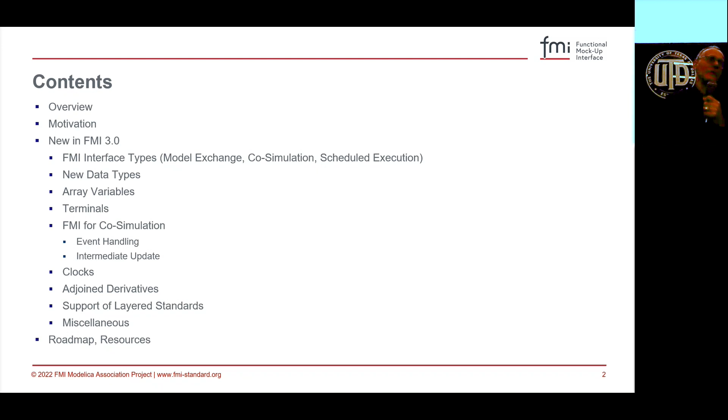So I talk a lot about the motivation for why FMI3 was actually necessary, because FMI 2.0 has been incredibly successful, and because of that, new use cases came up. Then I basically go through all the new features in FMI3 and give motivations why they were added, what it's good for, and what to expect from that. Then I'll talk a little bit about the roadmap - where are things going next with FMI, because there's really still very active ongoing work.

So let me do a little bit of a comparison. On the geometry side, there has been something that has actually contributed to the name giving of FMI - the digital mockup for packaging geometry, structures and parts. So if companies work together, they deliver geometry of their components as CAD data, and it's really easy to compose very complex structures from digital files which are transferred between companies, and they really just fit together.

There's been a whole other set of standards in order to enable that, and that has been going on for much longer actually than the Modelica Association. So OEMs can assemble these from the whole virtual system, and you can check consistency of these things, compute design envelopes, evaluate how things can be assembled and disassembled, etc. But there's no behavior in it. And that was basically the idea behind FMI.

But with FMI2, we didn't get far enough, because this really easy composability and assembly—being able to compose a much larger simulation just from the units—wasn't quite there in FMI 2.0. Taking a step back, I think it was completely right to do FMI 1 and 2 as they were, because in terms of complexity of the standards, it's a big step up in complexity and capability.

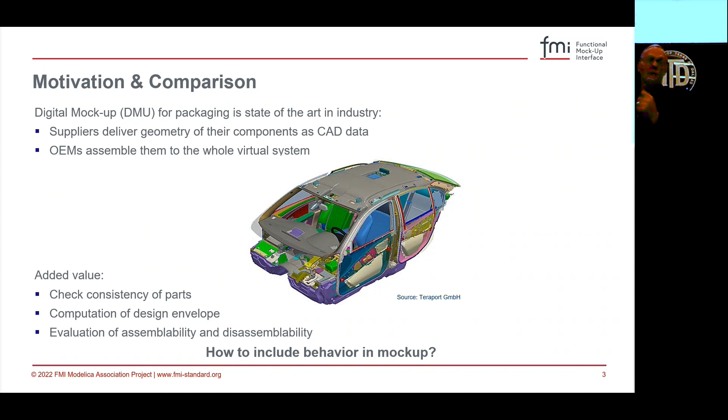We now have more than 170 known tools supporting FMI 2.0, plus plenty of unknown and in-house tools. I think the uptake with FMI 3 will be slower because it's a lot more complex, and fewer tool vendors and companies will need its full power. But it is absolutely necessary for the new use cases of really being able to compose complex simulations from simple ones.

So when you go through different design phases—going from concept to design, optimization, implementation, test and verification, and operation—we use models in all of these, models of behavior. And we need to be able to reuse things through these different phases and bring systems together.

We want to go from concept to design, from component design to system design. That is the one step where FMI2 was not always good enough. And then we want to go to test and verification, and that is actually also something where EFMI comes in.

And then finally to operations and digital twins. On that side, you also have things like MPC—model predictive control—and that's really where EFMI will come in.

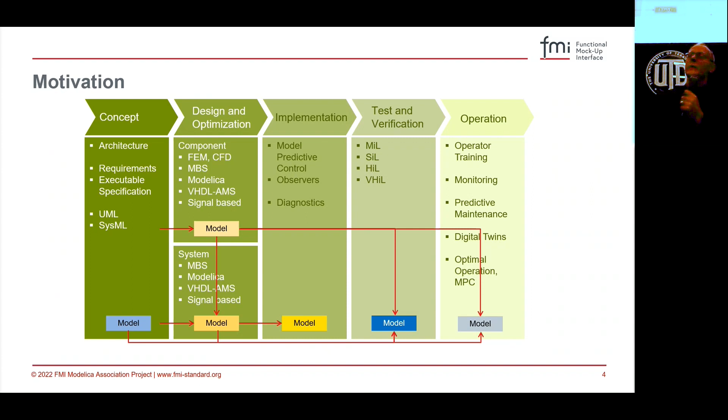So FMI brought us simpler plumbing for simulation. We have the model exchange, which is really ODEs with discrete events on how to connect systems of equations, and FMI for co-simulation to connect any model.

This whole FMI2 enabled a massive reuse of modeling investment, and has, I would say, brought enormous progress to the industry in terms of being able to reuse models through phases and reuse modeling investment. And FMI2 has enabled new use cases that actually require extensions to the standard in order to really get to where we are now.

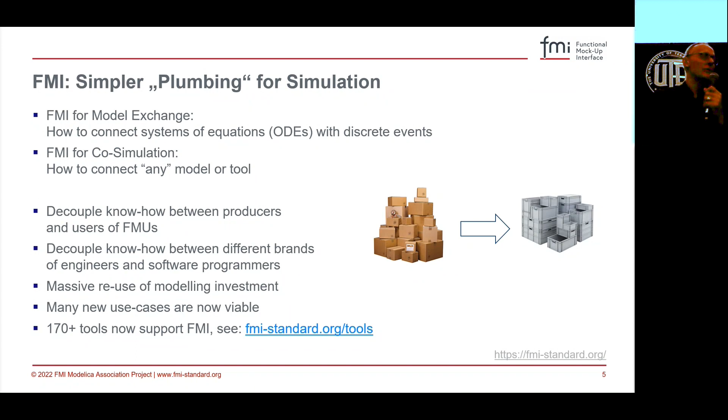And so the appetite came from the eating, and once FMI2 was there, people then started to have higher expectations of what can actually be done. So what are the use cases that require this?

On the automotive side, it was a lot about virtual electronic control units, where FMI2 works quite well for physics simulation, but it did not enable fully virtual ECUs, where in the testing phase you really want to bring together the physical model and the future controls—not as a model, but using the actual code and an emulator for the ECU. That's the phase where you do the validation and testing, not as model in the loop, but with code generated for the final hardware platform, executed on an emulator of that hardware platform, and then packaged into an FMU and brought into the validation process.

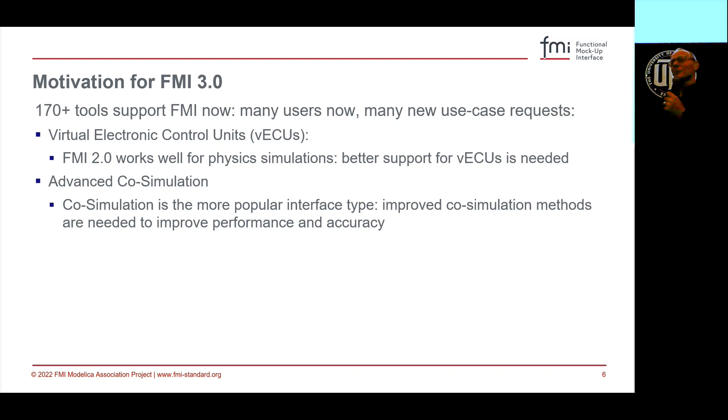Advanced co-simulation—I think I've written an article in NAFEMS magazine a few years ago titled something like 'Co-simulation, Art or Science,' because many co-simulations failed. Everybody that's a controls engineer knows what can go wrong, because you have a delay there, and so you affect the stability of the co-simulation, which has nothing to do with physical stability—it's a numerical instability issue, and lots of people trying co-simulations saw that and failed miserably. So the new features in FMI3 really work at improving the situation, very significantly, in terms of this instability you get with co-simulations.

Multi-FMU simulations are getting more and more common, and this issue from the last slide is something that more and more people actually ran into and saw - well, this doesn't work as well as it was advertised. I thought as soon as I had FMI, I could compose arbitrary FMUs. Well, not quite. Co-simulation is actually incredibly difficult, and I want to go back and make a pitch for Modelica.

Use it only if you absolutely must. Co-simulation you pay for very bitterly with lots of problems, even with FMI3, by the way. So if you can develop a system completely in Modelica, that is much easier. Model exchange in Modelica is much more useful, much less trouble than model exchange with FMUs.

I mean, obviously there are tons of cases where it can't be done. You cannot put the software as executed, like the VECU case, into Modelica. And it's absolutely right to do it with FMU. There's tons of cases which must be FMU, also co-simulation with CFD or finite elements.

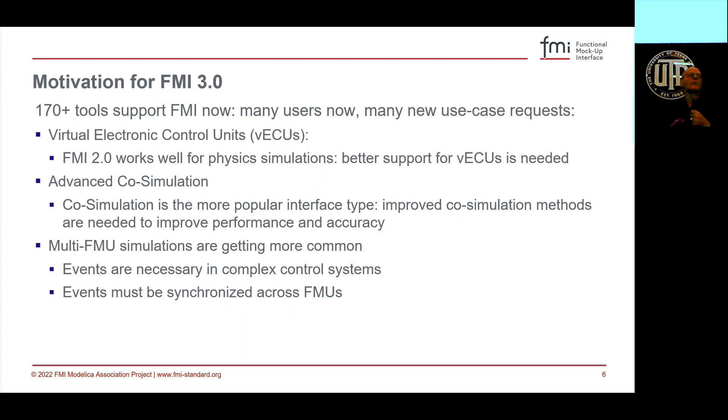But as long as you stay on the system side, I can just repeat what Scott said: reduce the number of tools as few as you can, stay in one framework, it will be so much better. Scott, do you agree? Okay.

And then there's new machine learning and AI applications, and FMI3 will actually help there.

I applied labels to all the new features. So if I talk about the features now, if it's VECU, you know what it's for: co-simulation, events, and AI. So you can track now which of the new features are for which of the use cases that I brought here as a means of simplicity.

So then there's also something which is overarching: API efficiencies. I mean, you can do things in software efficiently and inefficiently, and a couple of things were simply done to be able to do things more efficiently from the software engineering point of view.

So if you look at models and model exchange along the design V, the VECU is very much on the right side, AI mostly on the right side, a lot for operations when we get real data in. But you can also use it early in the design process to really simplify models.

That's actually very much the case from the Julia people. You can sometimes really well use reduced order and AI-based models in the design process to speed up searching a very large design space. Co-simulation and events are on the right-hand side and the left-hand side of the V equally.

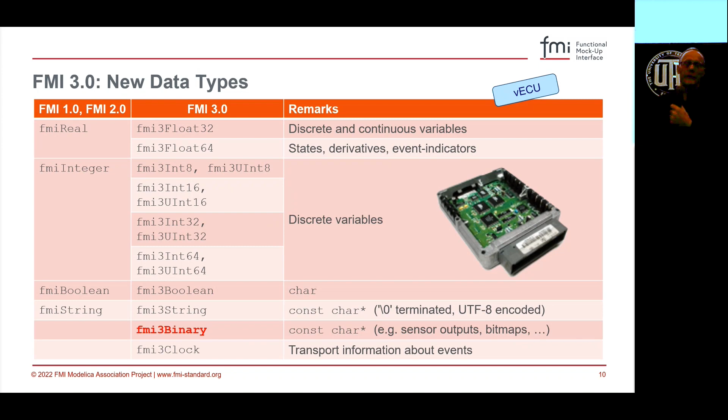So array variables, vectors, and matrices, also for the ECUs, but also a lot for API efficiencies. In FMI3, variables can have multiple dimensions. An element in each dimension can be either constant, specified with a start attribute, or changeable. Then it's a structured parameter, and it can only be changed in configuration or reconfiguration mode.

And so FMI3 set and get operators in the API now work on whole arrays. That's a huge thing in terms of API efficiencies. In FMI2, everything was converted into scalars, and that can be cumbersome.

Terminals and icons, that is really mostly about new use cases, because terminals can group input and output variables in the terminals, which can represent either buses on the control side or physical connectors. So the interesting thing is, you can now make something look like a Modelica model, even though it has a given input-output causality.

So if I may take a small poke at one of the big competitors of Modelica, which are old-style C, C++ tools with fixed causality, like Amesim from Siemens, for example. You can now do in FMI3 exactly what tools like Amesim do in their user interfaces, because they have fixed causalities, but they use terminals with connectors exactly in there in order to make it look like it's an acausal connection, like in Modelica.

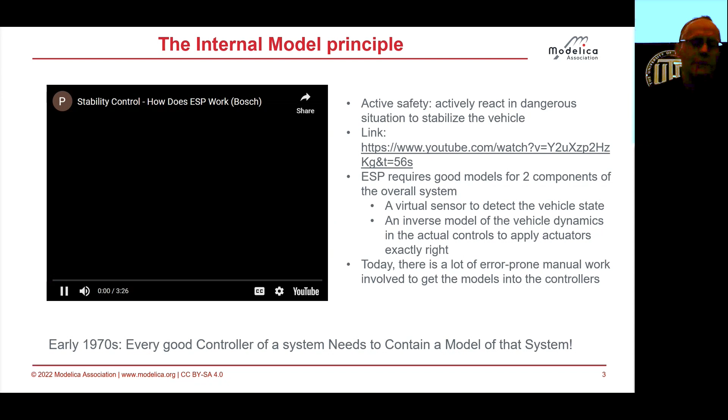Why? Okay, now I start with something slightly more relaxing. I hope this works. I don't know if the audio works. I actually...

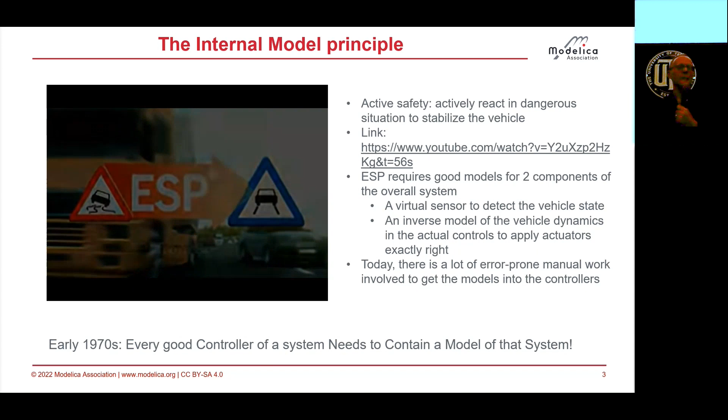This is a video from Bosch about ESP stability control. I have the audio off, so I will just comment on this. Bosch deserves real credit, and that's why I'm showing this video, because they were really one of the main driving forces behind the EFMI standard, and that may become obvious.

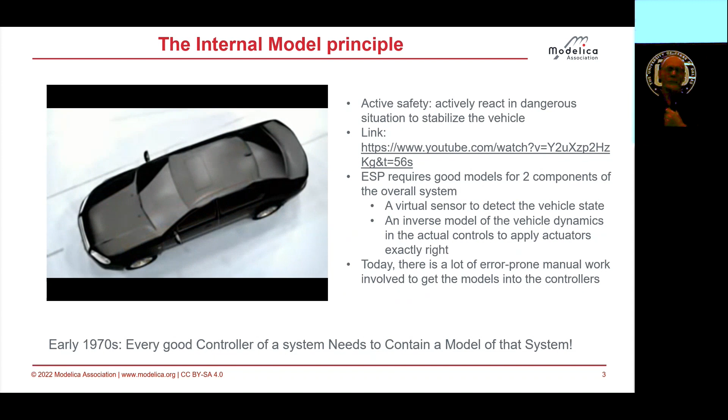What is ESP about? It's active safety in cars. You need to actively react to dangerous situations and stabilize the vehicle. In order to do that, you need models inside of the car, inside the system.

So this is a situation: you drive on a highway, and nothing's happening. You're driving, you get a little drowsy, and suddenly something happens, and then your car starts spinning. ESP is basically about trying, with smart controls, to avoid this situation.

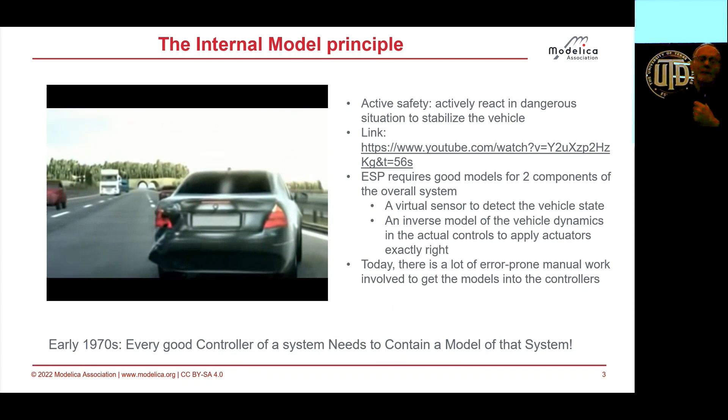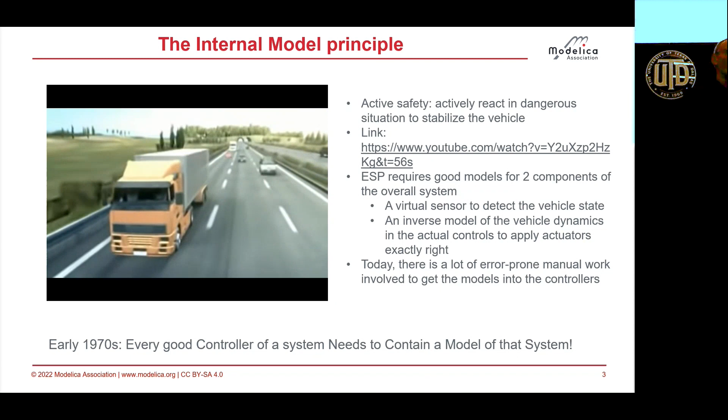So this is now the same simulation, but with a vehicle that has an active ESP system inside. ESP is an electronic stability program or something like that. The controller actively starts reacting and doing stuff. There are lots more situations where ESP can come in, and this video goes on longer, but I want to stop it here. This was just a little bit to start.

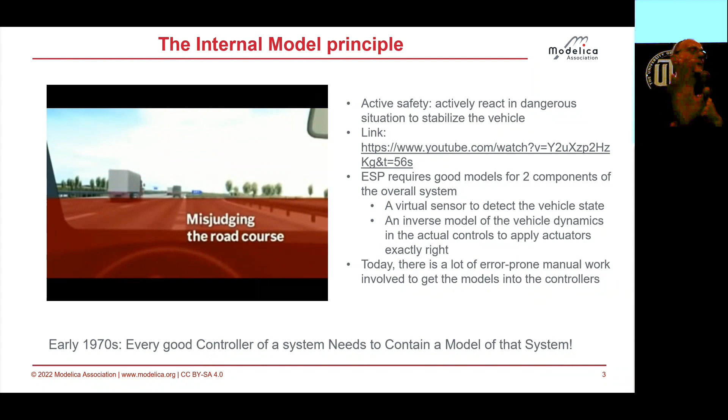Why do we need models in embedded controllers? This is really an old story. Since the early 70s, people have known that every good controller of a system needs to contain a model of that system - the internal model principle. Scott probably knows and has read a lot more about that than I have, having taught controls for quite a few years.

But back to ESP, you need two components of the overall system inside the controller. You need a virtual sensor to detect the system state, and the state is really relatively complex - mostly acceleration in all kinds of directions. You need to make sure to stabilize the car, keeping these accelerations within certain bounds, and when you start to spin with circular acceleration, you want to stop that. The ESP then actuates brakes on single wheels, so when it starts spinning, the brakes produce a counter torque to stabilize the vehicle.

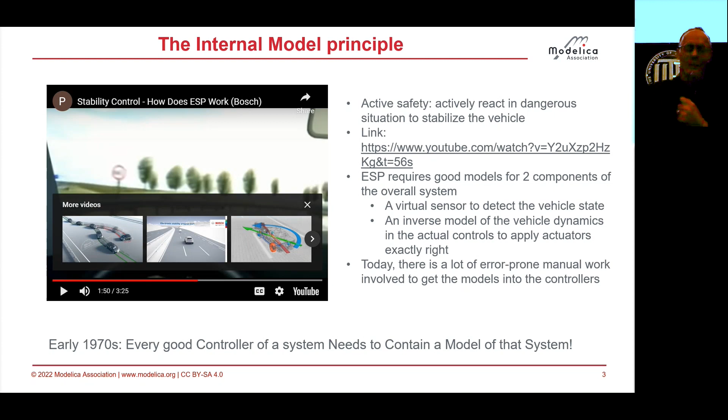What that does is make the vehicle behave as the driver wants it to behave, instead of spinning out because the vehicle has lost control. So you need two things: the virtual sensor, typically something like an extended Kalman filter, because you don't have exactly the right sensors and need to get from some sensors to the real state; and an inverse model of the vehicle dynamics to apply controls so the car does what you want instead of what inertia and physics make it do. Okay, so enough motivation here.

Advanced control is challenging - the title could have been yesterday's keynote talk. We know advanced control is challenging. Online physical models, models inside these controllers, are key technology for advanced control software. This has come from the automotive industry - it's a big industry with a lot of money, and safety is very involved - but this holds for all other industries too. There it's much more about efficiency, but in aviation it's the same. What we want to do is inject the magic potion of physical models into controllers.

MPC is something like that - model predictive control. With nonlinear MPC, we actually have nonlinear models in the loop in the controller. The problem is that these worlds of physics and embedded controls are very different. They talk in different terms, the people don't understand each other, and it's very different standards.

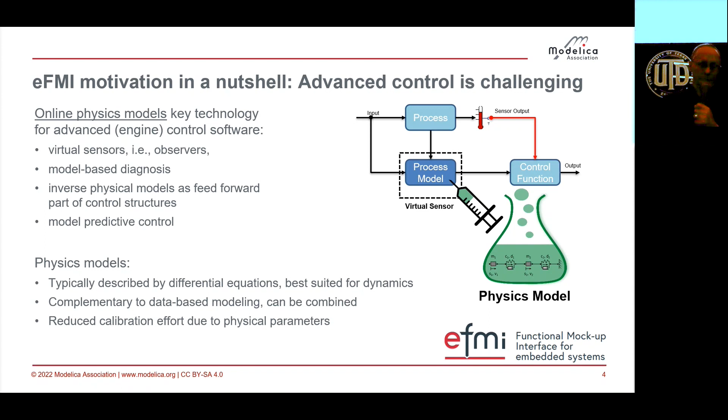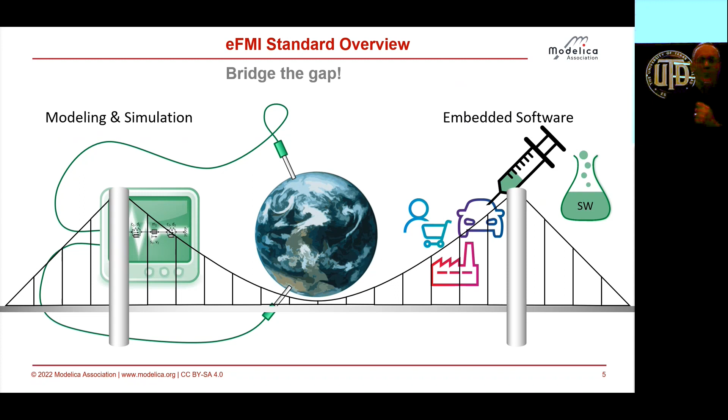So what we want is to bridge the gap between modeling and simulation, where we figure out what the world is doing and try to recreate that. Great talk from Dirk this morning about that. And then we have products in the real world which we want to control through embedded software, and we need to get these things together.

So the state of the art there for people that develop controls is that they really need to understand everything. They need to understand the physics modeling, what is the right model for my controller. They need to understand controls engineering, so they build stable controllers, not unstable ones, like we saw yesterday in the talk that can sometimes happen. They need to understand numerics, because if the numerics of the model won't work, the embedded controller won't be stable. And they need to understand ECU software. That's basically a functional developer needs to be a superhero.

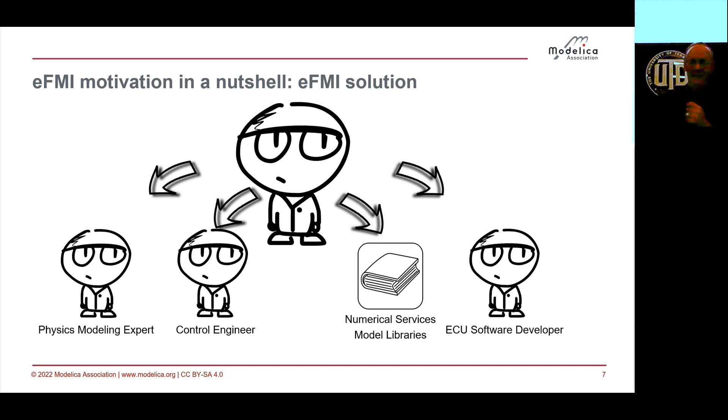So the idea of EFMI is to really be able, by a smartly done standard, to separate these things. And what we want is that instead of a superhero, we can have physics experts and control engineers, and all the numerical stuff we'd like to put into services and libraries which are pre-packaged and reused, and we have ECU software developers. In that way it's actually possible in finite time to build an advanced controller and put it on a device. We've heard Scott about how difficult that is for many of these things and how long it can take for industry. So that's what EFMI is for.

And we don't need the superhero anymore. So I'm now bringing in EFMI in the V model, from the systems engineering point of view.

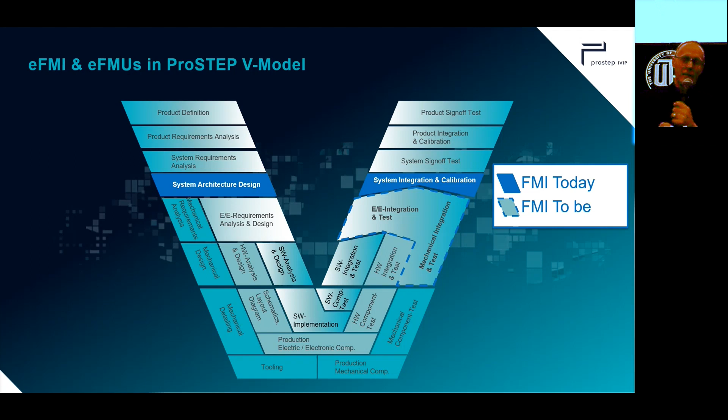I'm stealing slides by permission from ProStep iViP, which is a European non-profit organization in the systems engineering domain, trying to coordinate standards there. So this V model is a little bit too complex for my taste in this talk, but I think it's useful to see how other organizations and people see FMI and EFMI. So everything that's blue is FMI as it is today, and the blue dashed lines are a little broader here, FMI to be.

And there is a next step where they see that EFMI really helps and makes this more useful. So ProStep iViP is also promoting the EFMI standard and the EFMU. The scope of an EFMU is also important: it's one software component, a controller or a virtual sensor, as part of a cyber-physical system. The final system could be composed of, or could need, many EFMUs - it's one software component inside a complex cyber-physical system controller.

So there are recalibration steps for EFMUs when you adapt FMUs to real data once you have real system data in the design process. And the EFMI behavior model is a container that allows you to do much better validation and verification of your controller, and in particular the model inside the controller from your use. It really helps to promote a faster process through this design wheel, where the EFMI binary code container allows you to do functional tests and hardware in the loop.

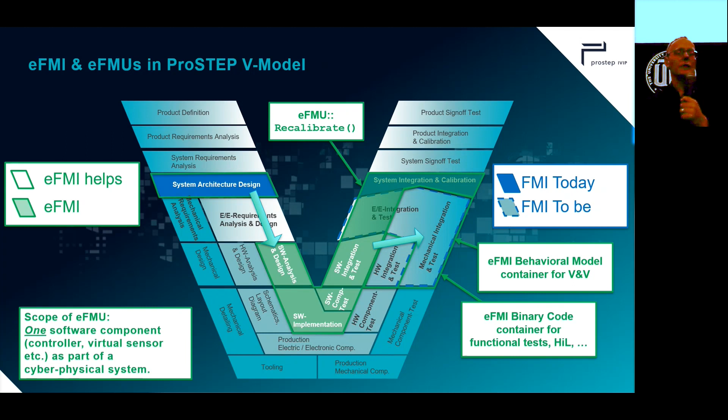So I will go now for more details about EFMI and embedded software. This is specific to the automotive industry, and EFMI was developed for automotive. I think it is at least as useful for many other industries. It may be that special tooling is needed, but the requirements from automotive hold the same for HVAC, I think - many of them are the same in the HVAC industry, as we heard from Scott, which is why they are part of the EFMI development group. And it holds for aerospace. It holds for really many industries. Some with very slow dynamics, you don't need that in that respect.

But you have specialized hardware with limited computing power and limited memory. It needs to be really cheap. It's single precision computations, which always gets you already a difference. You have a limited sampling rate, you have no exception handling. That is extremely important on the numerical side. No - if you do an ABS brake, you can't have a division by zero error.

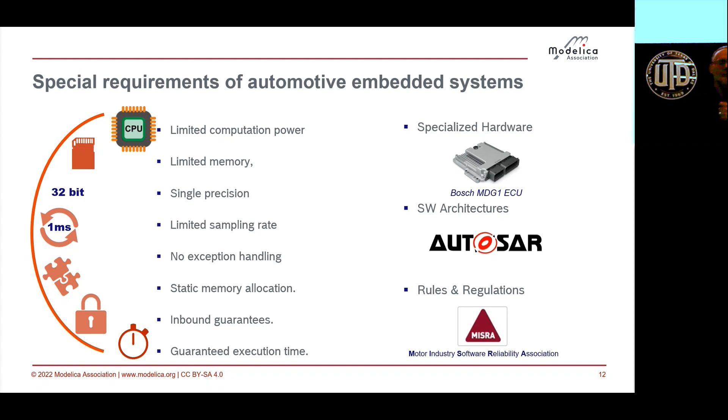FMI has a standardized C interface. You can have source code, but you always have source code on the way to an FMU, typically in C. You can use other languages. There are no guarantees. If you get an FMU, buyer beware—it can crash anytime. There's absolutely no guarantees. But on the other side, in embedded software, we want guarantees, and sometimes we must have guarantees if the ruling bodies say so. So that is really very different.

So eFMI has a standardized logical interface with some very simple prescriptive steps about startup, recalibration, and do-step. It's very simple. And this logical interface is described by a new language called GALEC—I think that's Guarded Algorithmic Language for Embedded Control. And I would say that this GALEC language is the most important and best innovation that was developed within the standard, because it didn't exist before. And GALEC, I think, is the core piece in making sure that you can actually separate the concerns from the modeling and simulation side and the embedded side.

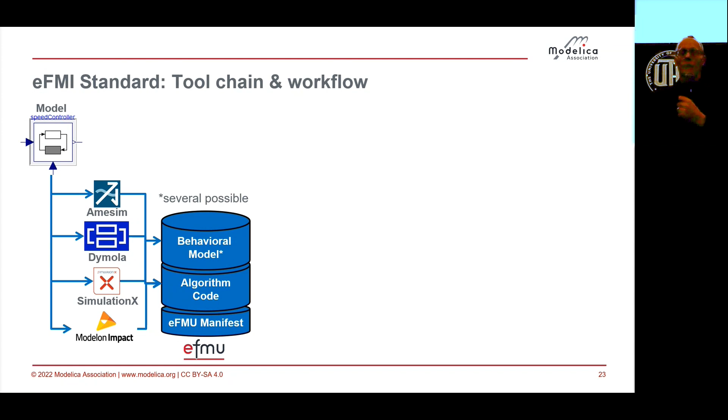And then, as you move on, you bring in new types of software that actually go on and produce production code, and possibly binary code, which then needs to actually comply to standards like AUTOSAR on the automotive side in order to get that together. And that is a completely different set of software. So TargetLink is by DSpace, SCODE-CONGRA is a tool by a company now owned by Bosch.

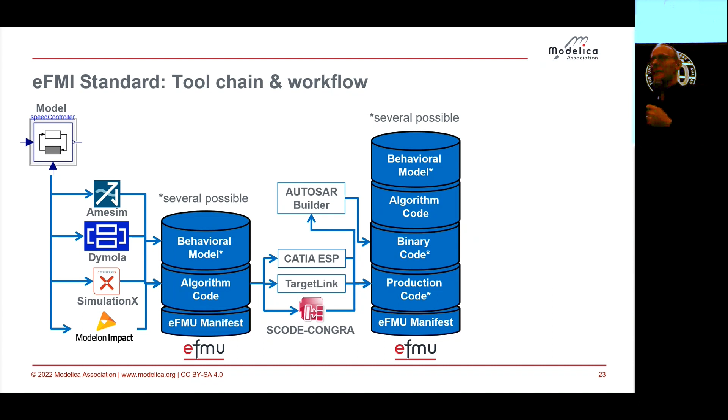And also here we have the possibility of having several binary codes. So one EFMU can contain code for just a normal PC, Linux or Windows, and then you can run your SIL tests, and for the actual embedded target. And that both should be compiled from the same algorithm code at least, and possibly and best from the same production code. I mean, that depends on whether - that gets into details.

And then once you have these things, you can actually do code analysis by software tools, which are for code analysis and testing, and you can bring it onto the real hardware and do system integration, do hardware in the loop or rapid prototyping. You can do all the good things to validate that concept.

The starting point for all of this great workflow is the GALEC program generated by the modeling tools. And that is really the key part that enables the separation of concerns and to get rid of the superhero, and instead have modeling experts on the modeling side and embedded experts on the embedded side.

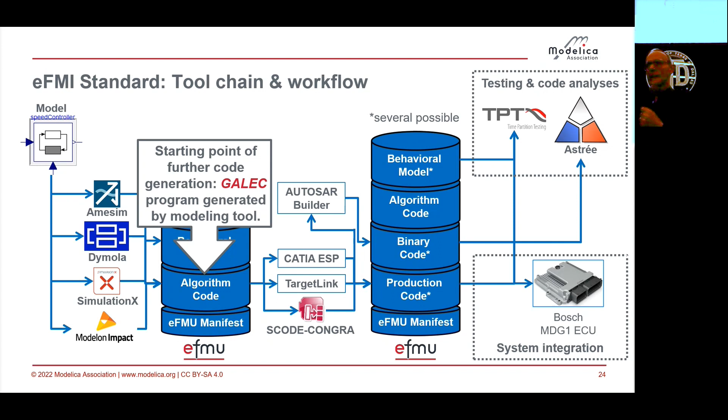Then obviously you get into an iterative development here, and in order to enable that, you can wrap this FMU around the EFMU. That makes the exchange easy.

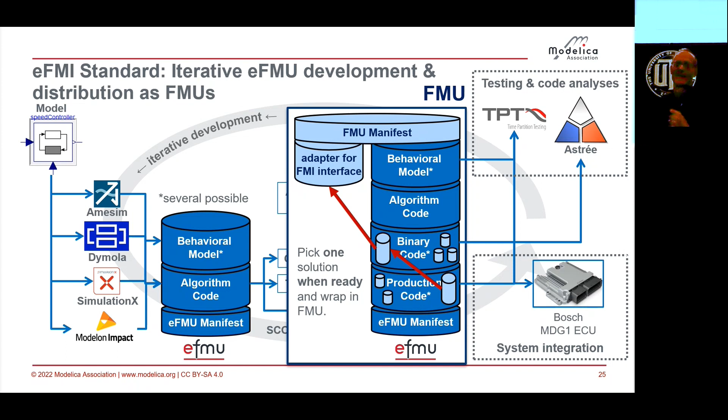Okay, so I think I've done - I might almost be over time here actually, and not quite done. But I think this is really the core of the standard. I think I've given you the meat of what you would want to know about EFMI and why. And the rest of the presentation is really about everything that has been done to make sure that we actually did the right thing with the EFMI.

So there's been an enormous amount of verification and validation effort. There is a library of validation cases from trivial to large and hard. A Modelica library is 22 test cases and 43 variants. There are a couple of Amesim models to go through this whole thing also with C code, and some manually written GALEC codes, which allow very specific test cases, which are maybe difficult to generate from models.

And testing was really set up to cover a large range of typical examples and challenging examples. Unfortunately, a lot of the information of what was done on this verification validation effort is non-public because it was done in these projects, and so that is only shared between the projects published in the EMPHYSIS project. But I think the outcome and what is public about the eFMI standard is actually very good, and everything that the Modelica Association was involved in is public, and many of the public institutes.

So the DLR, I think, has been working mostly with the Modelica library, with the test cases, or contributed a lot. And a couple of the companies have contributed. But that library is really a great asset for anybody wanting to implement. So more than 500 test scenarios, and an EFMI compliance checker has been integrated.